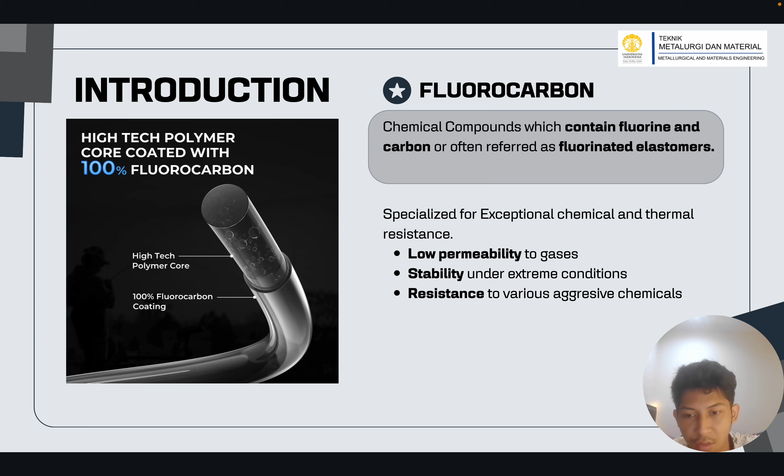The key applications in industries: the history and development of fluorocarbon polymers made its debut with the discovery of PTFE by DuPont in 1938. Over decades, advancements in fluorination chemistry led to the creation of elastomers in 1957 by Viton, which combined flexibility and durability, making them indispensable in industries requiring materials that can endure extreme conditions.

In applications across industries, the first is electronics manufacturing, where fluorocarbon is used for insulating cables and wires operating in high temperature or corrosive environments.

In industrial applications, fluorocarbon resin coatings are used because of their durability and performance. And the last one is chemical processing, where seals and linings are used for pumps, valves, and storage tanks handling corrosive chemicals.

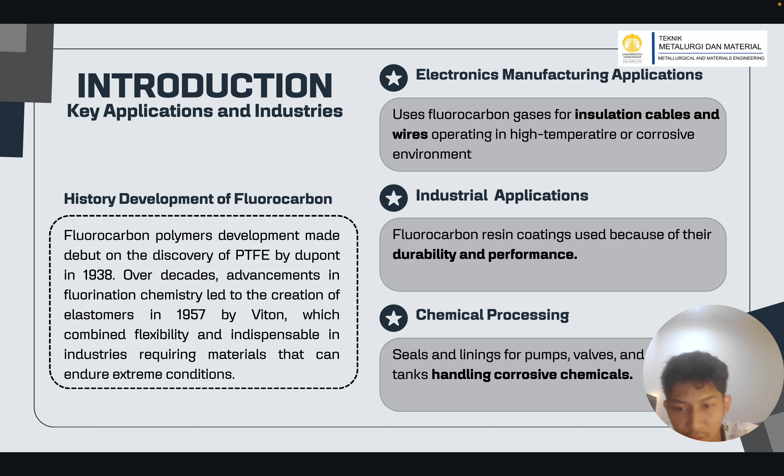For material properties, we have physical properties, mechanical properties, chemical properties, and unique characteristics. For physical properties, thermal stability: fluorocarbon polymers can withstand temperatures ranging from minus 20 degrees Celsius to 250 degrees Celsius, with some special grades tolerating even higher temperatures.

Low permeability is the exceptional resistance to gas permeation, making them ideal for sealing and insulation applications. And aging resistance, with outstanding resistance to weathering, ozone, and UV radiation, ensures longevity in outdoor applications.

For chemical properties: chemical resistance means superior resistance to a wide range of materials, including hydrocarbons, acids, alkalis, fuels, and solvents, making them ideal for use in aggressive chemical environments. Hydrocarbon compatibility means they also perform well in contact with oils, gases, and fuels without significant degradation.

For mechanical properties: elasticity and tensile strength mean they maintain flexibility and strength across a wide temperature range, though less elastic than natural or silicone rubber. Compression set resistance is the excellent ability to maintain shape and sealing ability under long-term compression and heat exposure.

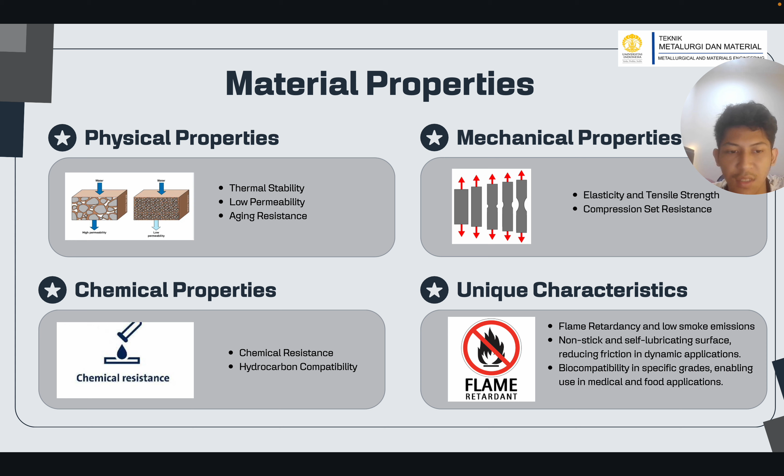Unique characteristics include flame retardancy and low smoke emission, non-stick and self-lubricating surfaces reducing friction in dynamic applications, and biocompatibility in specific grades, enabling use in medical and food applications.

The selection criteria: key factors influencing selection include the application environment. It is chosen for applications requiring extreme chemical and thermal resistance. Longevity requirements make it ideal for environments demanding minimal material degradation over time.

Cost versus performance: fluorocarbon polymers are more expensive than many other elastomers, but their long-term performance often justifies the investment in critical applications.

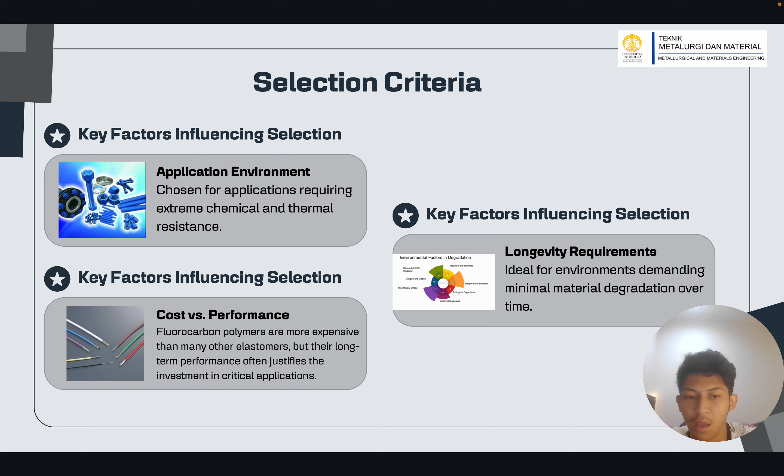In comparison with alternative materials, such as natural rubber: it offers superior flexibility and cost effectiveness for general applications, but lacks the chemical and thermal resistance of fluorocarbon.

Silicone rubber has excellent thermal stability and flexibility, but is inferior to fluorocarbon in chemical resistance and tensile strength.

Nitrile rubber has good oil and fuel resistance at lower cost, but limited thermal stability compared to fluorocarbon.

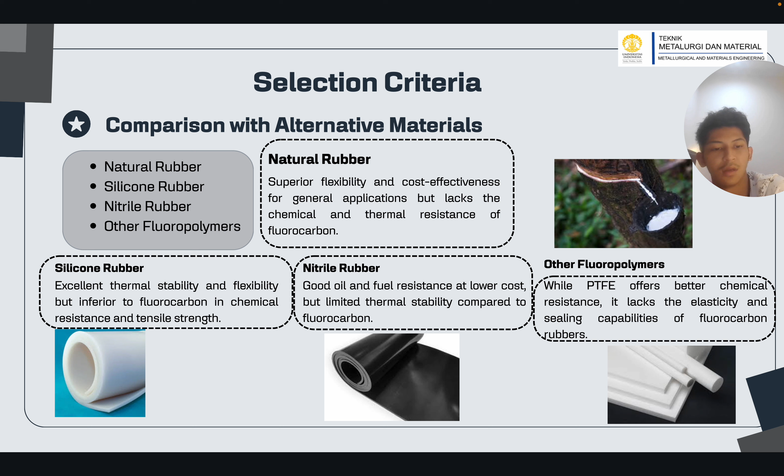Other fluoropolymers, like PTFE, offer better chemical resistance, but lack the elasticity and sealing capabilities of fluorocarbon rubbers.

Vulcanization generally uses elastomer and unvulcanized rubber molecules, consisting of sulfur that creates cross-linking, forming vulcanized networks.

The first step is material preparation, which involves compounding and pre-forming. In compounding, the raw fluorocarbon polymer is mixed with a curing agent. In this fluorocarbon phase, it is bisphenol or peroxide, which I can explain later, along with accelerators, fillers, and other additives.

The mixing is done in a manner using equipment like internal mixers or two-roll mills to achieve a homogeneous compound. In pre-forming, the compounded material is shaped into the mold design. Mold preparation includes cleaning and application of a mold release agent to prevent sticking and ensure easy part removal.

The third step involves loading the mold and carefully applying heat and pressure, at temperatures between 160 and 200 degrees Celsius depending on the fluorocarbon formulation. Typically, high pressure from 2 to 6 megapascals is applied to compress the material and fill the mold completely, ensuring proper shape and surface finish.

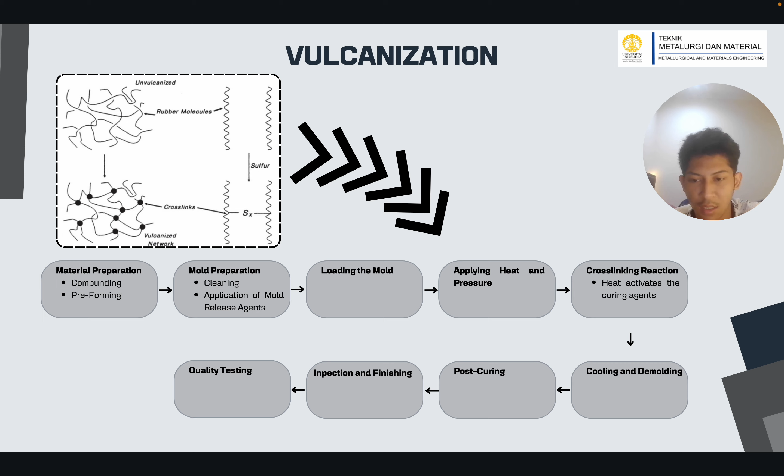The first curing technique is bisphenol curing. It is the most common technique for fluorocarbon polymers because it provides an excellent balance of chemical resistance, thermal stability, and mechanical properties. These properties include high chemical resistance, especially to hydrocarbons and acids, superior thermal aging resistance, and minimal compression set, making it ideal for sealing applications such as automotive seals, O-rings, gaskets, and aerospace components exposed to fuels and oils.

The second one is peroxide curing. It is currently employed for specialized applications, used for fluorocarbon where enhanced thermal stability, mechanical strength, and chemical resistance are required. It has superior mechanical properties compared to bisphenol curing, and chemical resistance to strong bases and amines, which can degrade bisphenol cured materials. Applications of peroxide curing include oil and gas seals, chemical processing equipment, and high performance gaskets and linings.

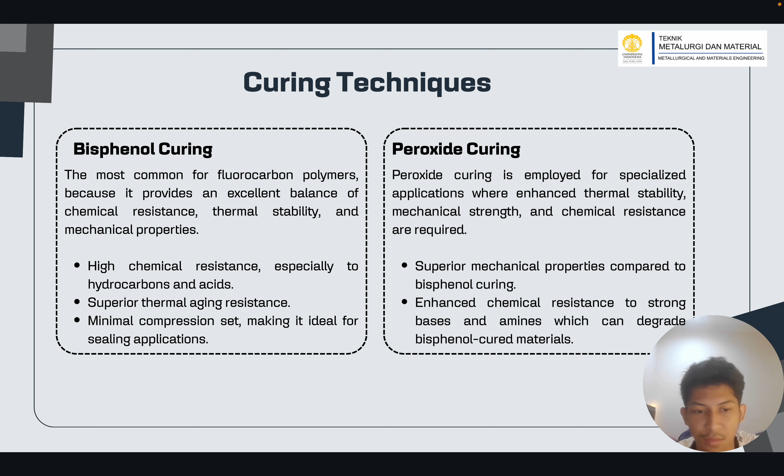For the next part, we cover application and processing techniques. For the application, we choose gaskets, fishing line, and tubes made from fluorocarbon.

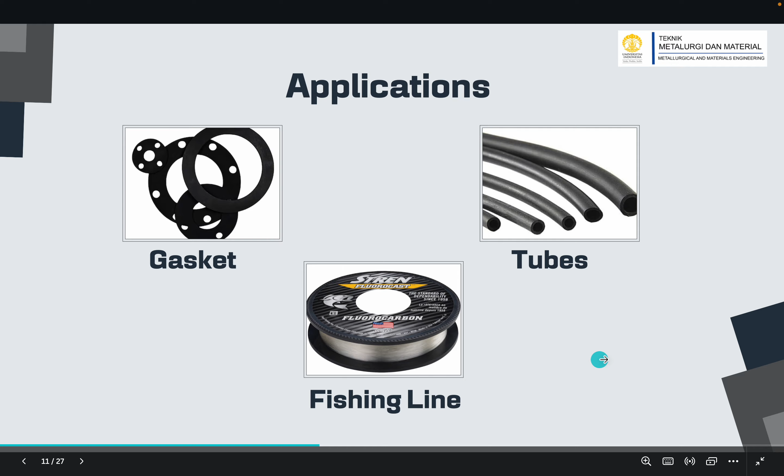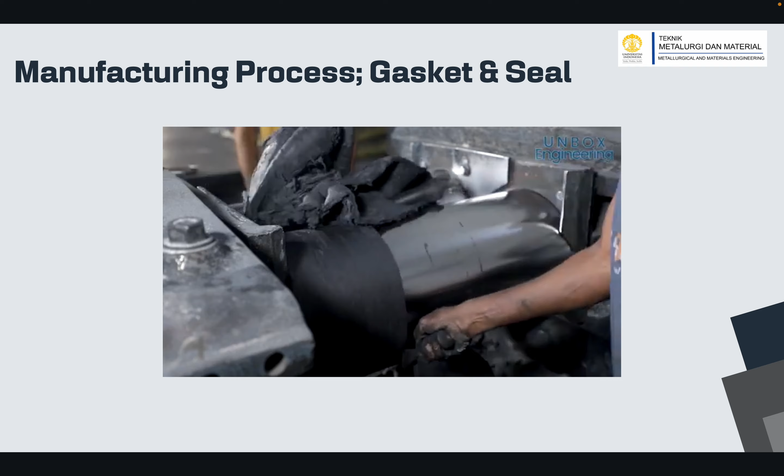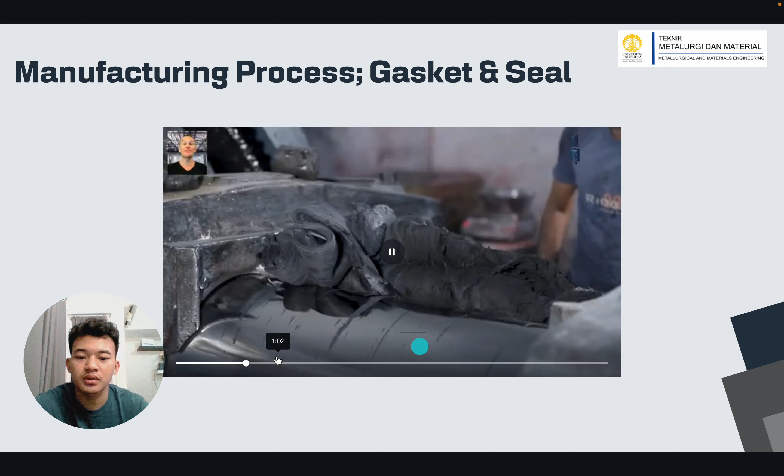In this video tour, we will see various gasket manufacturing processes inside a factory. The process starts with mixing the raw materials in rollers. Then the rubber is added and removed from the roller continuously. After that, the rubber is made more elastic and the prepared sheet is cut.

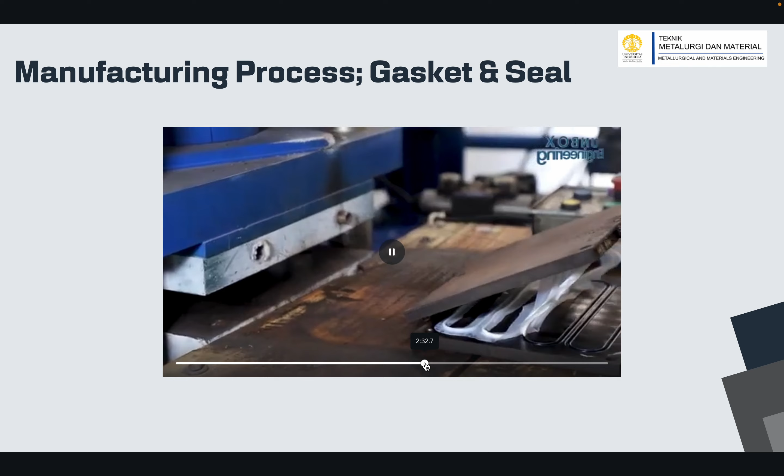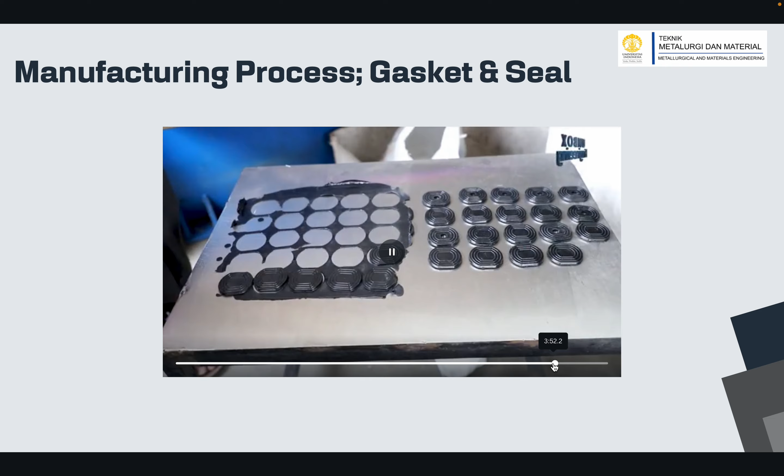Next, we'll see the silicone gasket making process. It is pressed and then shaped, then heated. Lastly, extra silicone is removed.

For the gasket and seal manufacturing process, there are three steps: mixing, shaping, and trimming. For mixing, for rubber gaskets, raw materials are mixed with additives to enhance properties like elasticity and durability. For shaping, we use a machine to stamp out shapes from the material, and for complex shapes, melted material is injected into molds.

For trimming, after the cutting or molding process, excess material is trimmed away. The gaskets are inspected for quality, and any defects are addressed before packaging.

These are the specific equipment used: cutting machines, molding equipment, and testing equipment. For the standards, we use ISO 9001, and for testing, compression testing and leak testing.

For failure and troubleshooting: material degradation, exposure to harsh chemicals or extreme temperatures can lead to material breakdown. For poor installation, incorrect installation can lead to misalignment or improper compression, causing leaks. For prevention, we account for chemical compatibility, choosing gasket materials that are compatible with the chemicals present in the application environment.

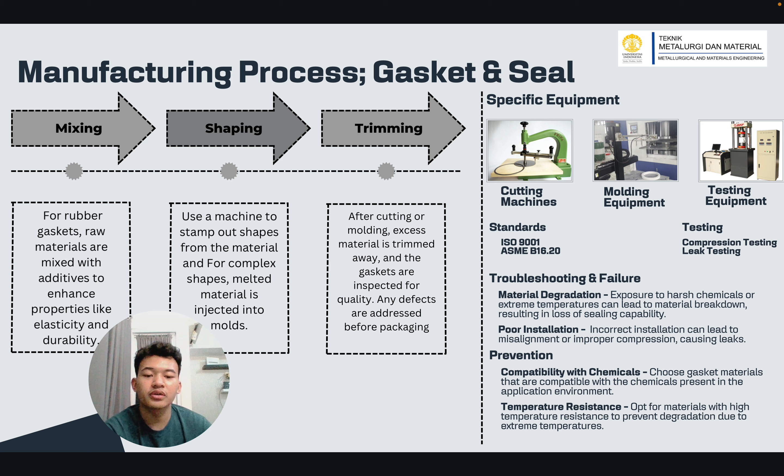For temperature resistance, we use materials with high temperature resistance to prevent degradation due to extreme temperature.

Fishing line. Early fishing lines were made of vines and braided horsehair, but today fishermen rely on braided lines. That doesn't mean it's not strong.

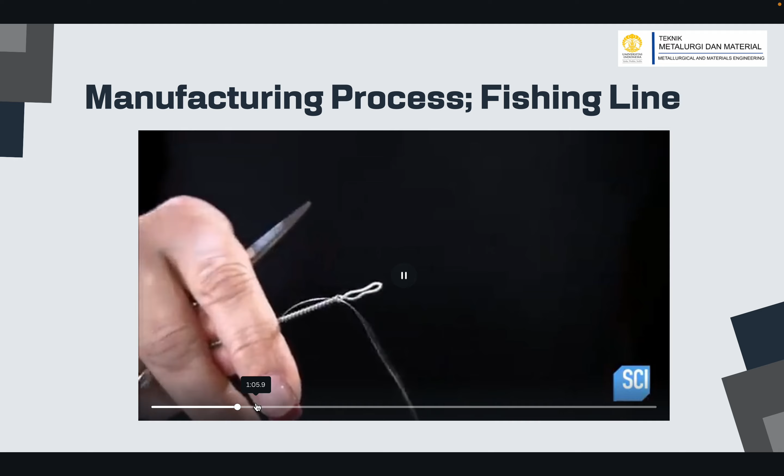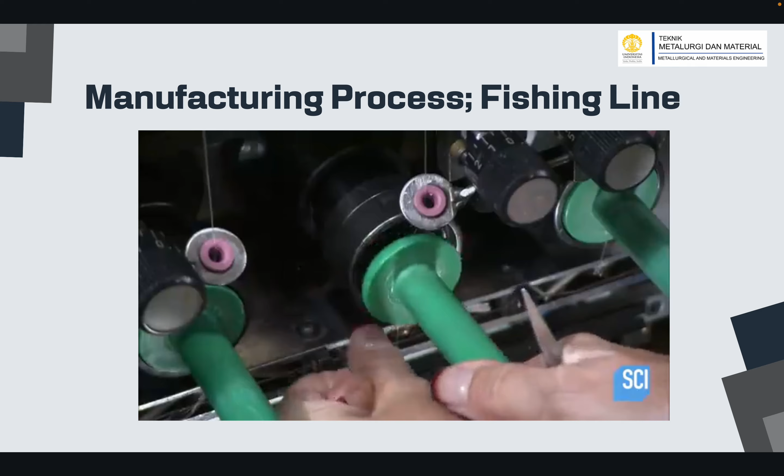A single tight cord. An employee starts by threading fibers through needles. She pulls the needles through spring-loaded devices that keep the fibers at an even tension as they unwind onto small bobbins. These bobbins are designed to fit in the braiding machines.

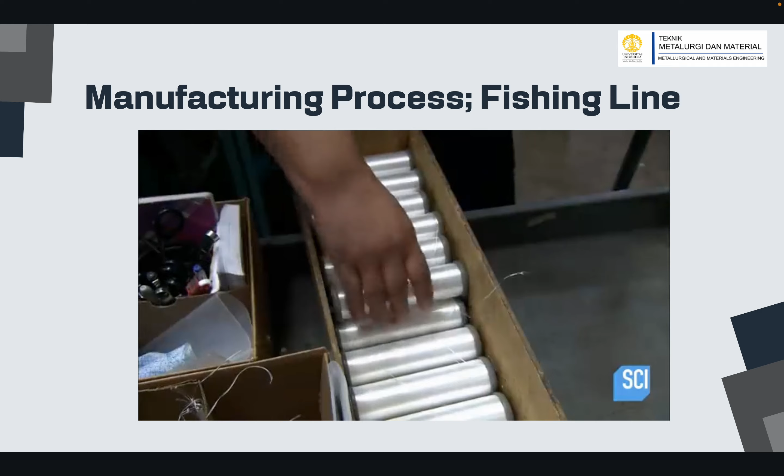The machines are called maypole braiders because the spools spin like dancers around a maypole. As they spin, they weave the strands into a tight braid. There are 4,500 braiding machines in operation at this factory.

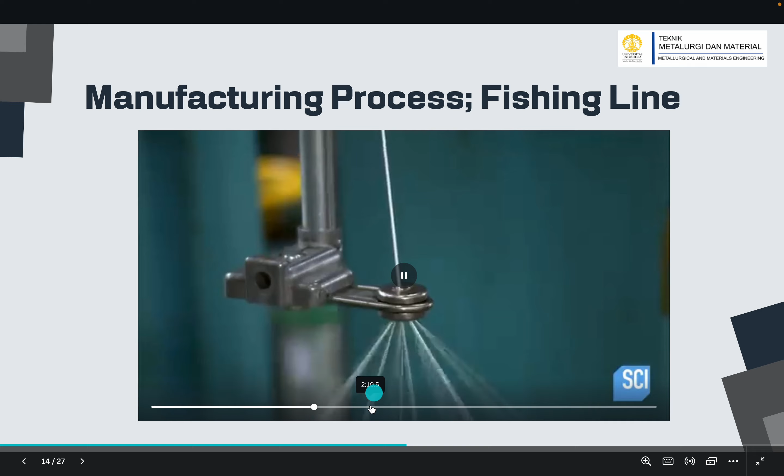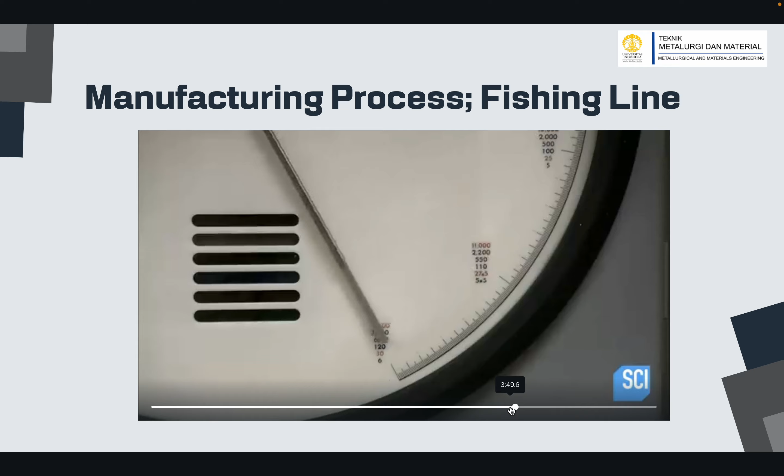And for the next manufacturing process, fishing line. First is braiding. The braided fishing line is made from multiple strands of microfibers, often made from polyethylene or synthetic material, but here we use fluorocarbon.

Then dyeing. The dyeing of fishing line is a process used by anglers to restore or change the color of their fishing line, particularly braided lines that may fade over time due to sun exposure and wear.

Next is resin. The manufacturing of fishing line involves the use of various synthetic resins, which play a crucial role in determining the line's properties such as strength, flexibility, and abrasion resistance.

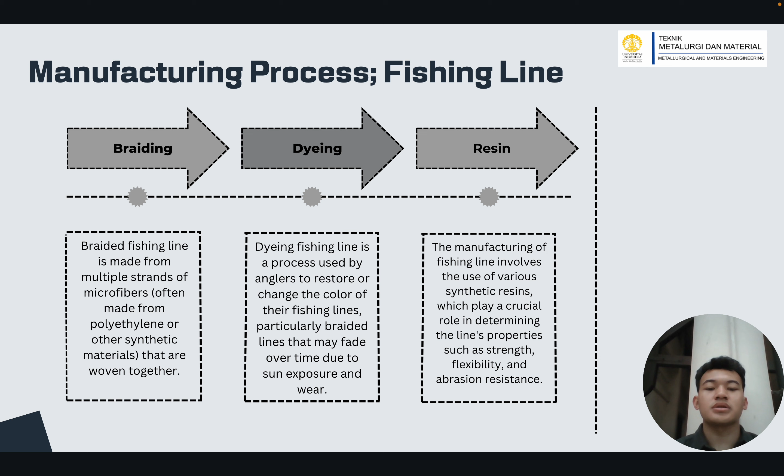For fishing line, the equipment used is the extruder, braider machine, and dyeing machine. For standards, we use ISO 12875 for traceability, and ISO 12878 for environmental monitoring. For testing, we use tensile strength and abrasion resistance.

For troubleshooting and failure, the first one is poor curing. Underheating or overheating during the curing process can prevent the resin from setting properly, resulting in weak or brittle fishing lines. Next is poor extrusion.

Inconsistent feed rates into the extruder can cause uneven fishing lines with varying thickness or weak areas.

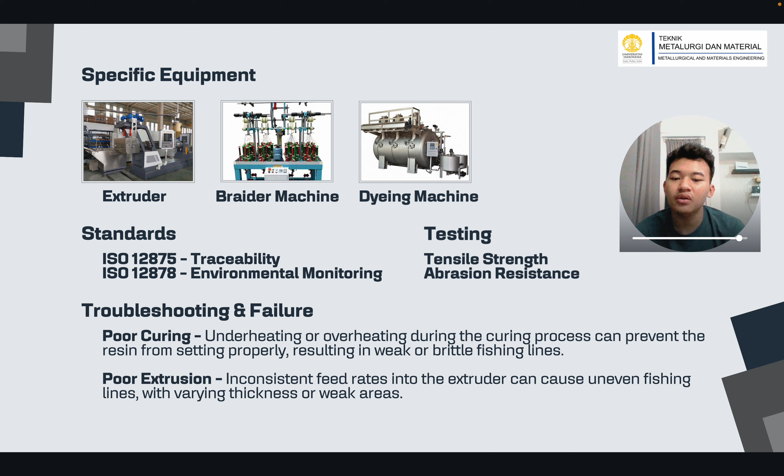For prevention, we ensure proper curing of fishing lines. It's crucial to monitor oven temperature using calibrated thermocouples to ensure consistent heat throughout the entire process.

For poor extrusion, we must make high quality fishing line. It's important to calibrate the extruder's equipment regularly.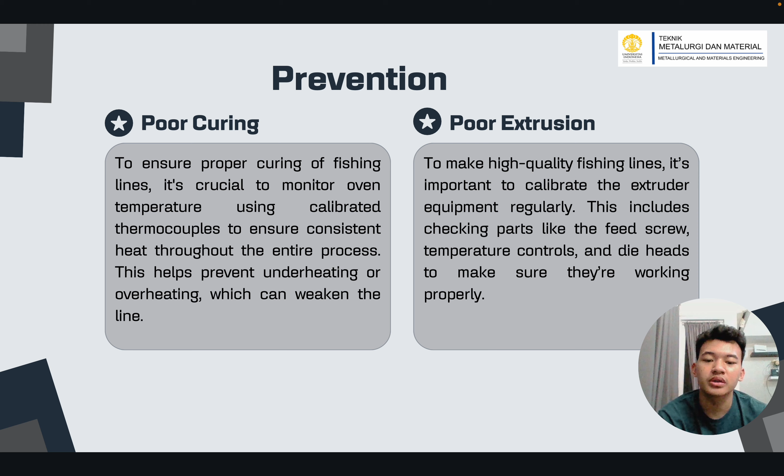Throughout the ages, artificial light has let people extend the convenience of daylight long after the sun goes down. Fluorescent tubes are more energy efficient than light bulbs. That's probably why they've become a fixture, so to speak, in stores, factories, and offices.

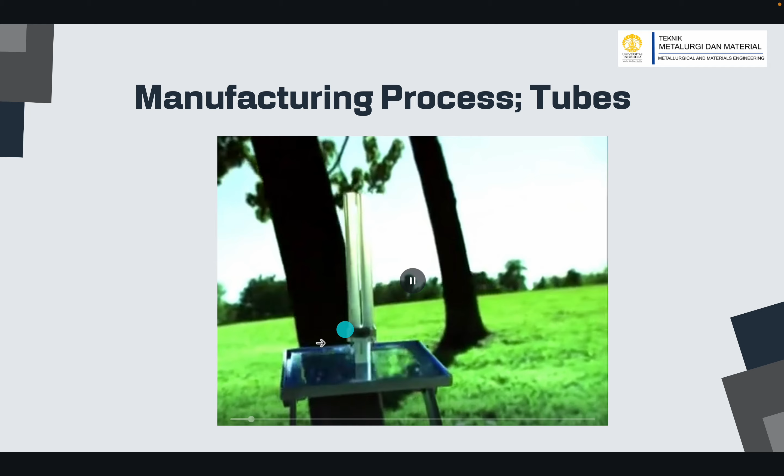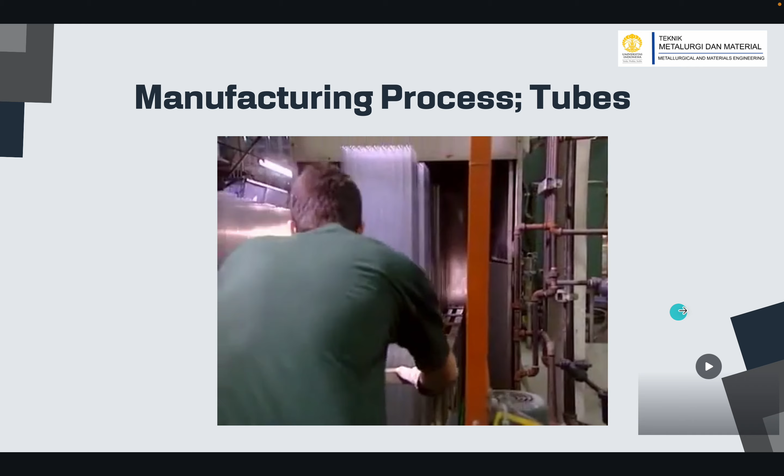For the manufacturing process of tubes, we use polymerization, extrusion, and cutting. For the polymerization, the raw material undergoes a chemical process called polymerization to form long chain polymers. For the extrusion, the polymer is melted and forced through the die to create a continuous tube shape. As the tube exits the mold, it is cooled to harden the material. For the cutting, the tubes are cut to the desired length, and any excess material is trimmed away, and the surface may be treated to improve adhesion or appearance. For the equipment, we use extruder, molding equipment, and testing equipment.

For the standard, we use ISO 1629 and ASTM D1418. For the testing, we use mechanical testing and chemical resistance testing. For the troubleshooting and failure, material degradation and poor installation. For prevention, we ensure correct installation practices are followed, including proper alignment and torque settings during assembly, and then regular maintenance and inspection. Conduct routine inspection of installed tubes to identify signs of wear or damage early on.

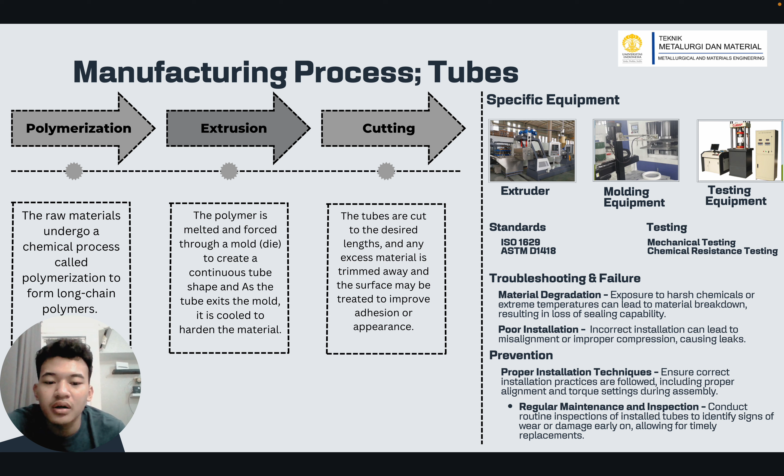Moving on to the environmental impact. For the gasket and seal, the first one is greenhouse gas emission. It has high energy and resource demand during production, increasing carbon footprint. The second one is environmental risk: disposal challenges due to the material's durability and resistance to degradation, leading to long-term waste issues. The last one is waste management: limited recycling options, so innovation in reclaiming used seals and gaskets is required. The second material is fishing line.

The impact of the first one is greenhouse gas emission. The manufacturing of fluorocarbon fishing lines produces emissions contributing to climate change, and the environmental risk is that lost or discarded fishing line persists in the environment, harming marine ecosystems due to their non-biodegradability. And the waste management issue is that it's difficult to recycle, often ending up as marine debris.

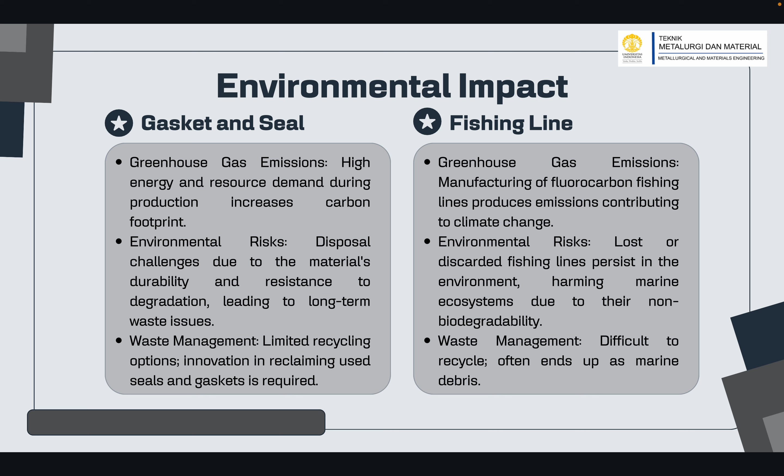For the tubes, the impact is also greenhouse gas emission, as production processes emit greenhouse gases impacting climate health. For the environmental risk, tubes that leak or degrade improperly can release harmful chemicals into the environment. And for waste management, the recycling and repurposing of used tubes are challenging due to their chemical composition and stability.

The strategies to minimize environmental footprint: the first one is improving energy efficiency in the manufacturing process, reducing overall emissions associated with energy consumption. The second one is implementing comprehensive life cycle assessment, which helps identify critical stages where emissions can be reduced or mitigated effectively.

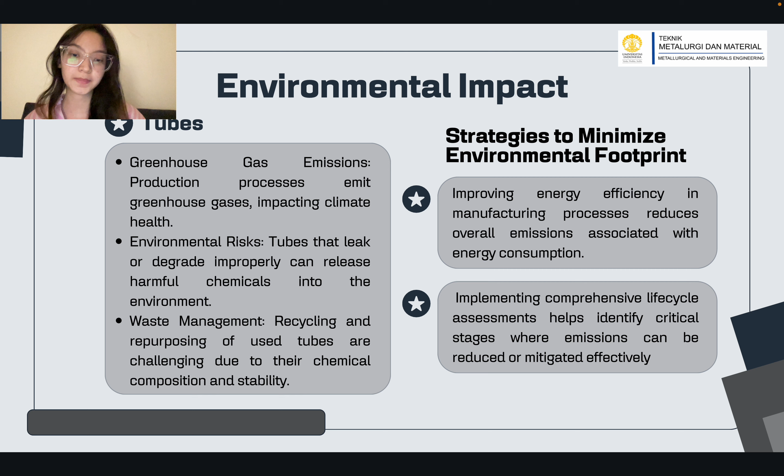Moving on to the sustainability initiatives. The first one is using bio-based alternatives. Researchers are ongoing into bio-based materials that could replace traditional fluorocarbons without compromising performance.

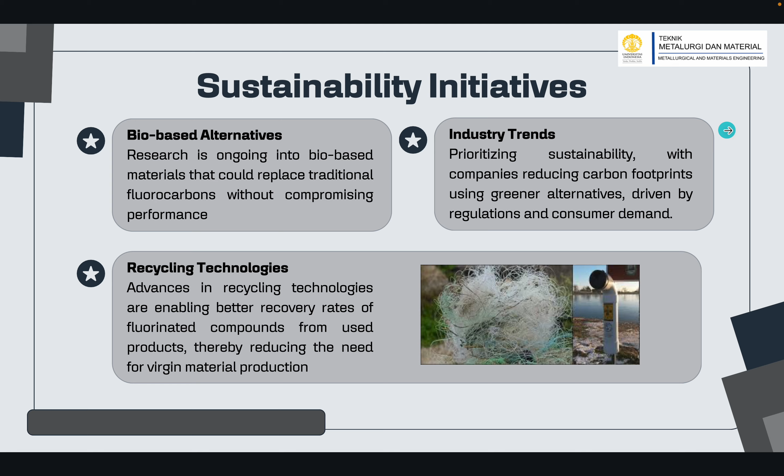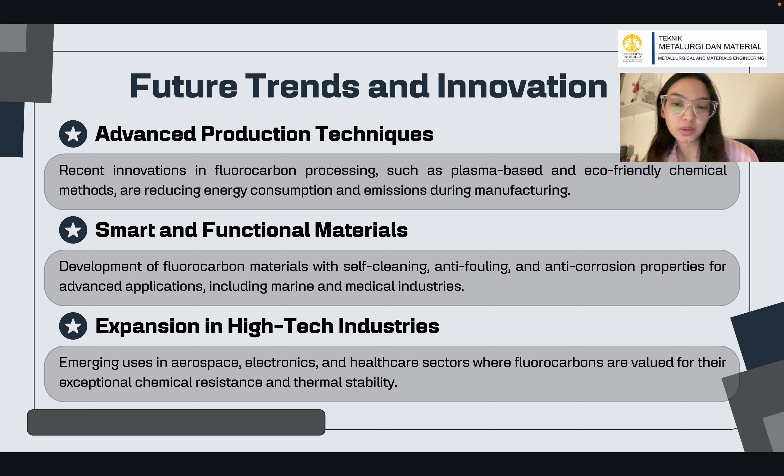fishing line. Next, the future trends and innovation: the first one is advanced production techniques. Recent innovations in fluorocarbon processing, such as plasma-based and eco-friendly chemical methods, are reducing energy consumption and emissions during manufacturing. The second one is smart and functional materials: development of fluorocarbon materials with self-cleaning, anti-fouling, and anti-corrosion properties for advanced applications including marine and medical industries. The third one is expansion in high-tech industries: emerging uses in aerospace, electronics, and healthcare sectors where fluorocarbons are valued for their exceptional chemical resistance and thermal stability.

The fourth one is bio-based and sustainable alternatives. Researchers are progressing on bio-based fluorocarbon alternatives and partially fluorinated compounds, offering similar performance with reduced environmental impact. The last one is enhanced performance for specific applications: new formulations provide increased tensile strength for fishing line, improved sealing efficiency for gaskets, and higher flexibility for tubing under extreme conditions.

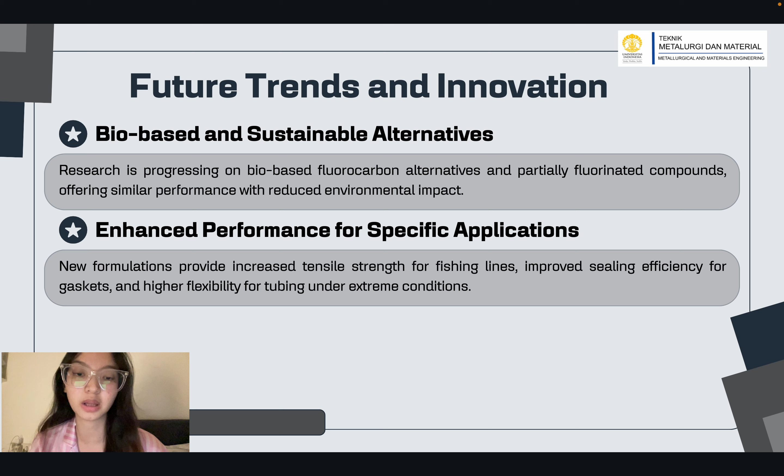That's all for the conclusion. It is specialized for chemical and thermal resistance and its application to electronics manufacturing, industrial chemical application. And then there are physical, chemical, mechanical, and unique characteristics as the key factors influencing selection, its environmental application, requirement, and cost versus performance.

Alternative materials have their own advantages. Next is the manufacturing of fluorocarbon, which is a complex process that requires careful attention to material selection, precise manufacturing technique, and strict adherence to industry standards.

To prevent failures in fluorocarbon tubes, manufacturers must implement effective strategies, including proper installation techniques and quality control measures. Next, fluorocarbon materials are essential in industries for their durability and chemical resistance, but pose significant environmental challenges, including high emissions and waste management issues. And then the last point is that advancement in recycling, bio-based alternatives, and energy efficient production methods offer a promising solution to reduce their ecological footprint, ensuring sustainable growth and environmental balance.

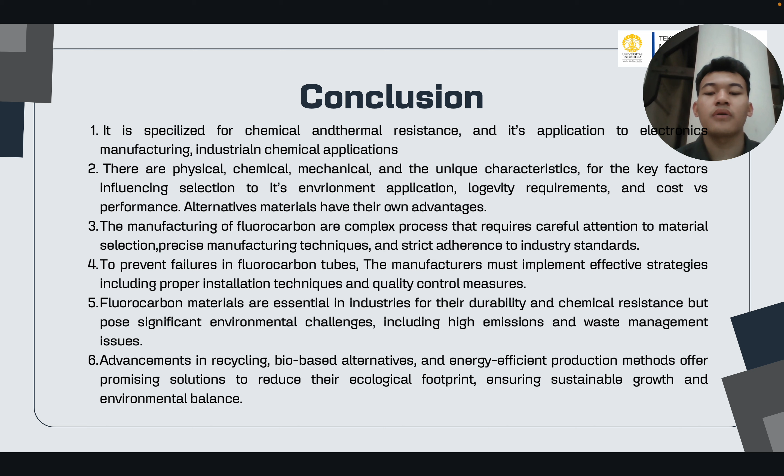Okay, that's it. And for the reference, you can see...